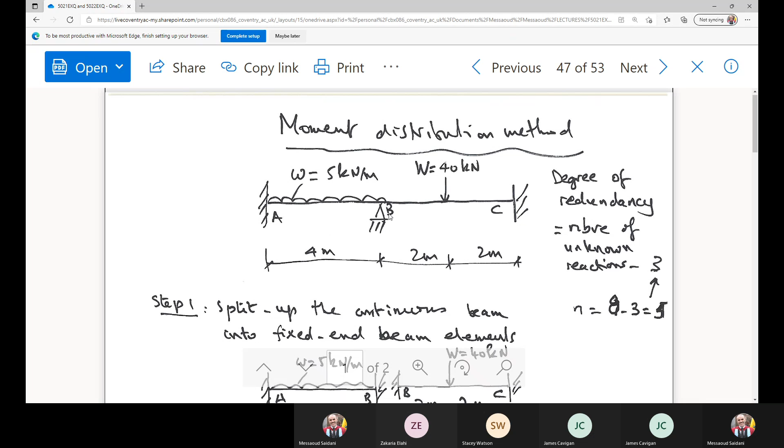The first step with this method is to split the beam up into fixed-ended beam elements. What do we mean here? We mean that you split the beam in the middle, at B, into 2 beam cases. So now we have AB, this one here. When you split up the beam, the intermediate joint becomes fixed. Can you see here? So intermediate joints become fixed, and now you have fixed-ended beam elements.

So we have AB with the 5 kilonewton per meter, and we have beam BC with the 40 kilonewtons in the middle. Okay, so that's the first thing.

Then we are going to use the fixed end moments, and this handout is already in Aula, so if you want to write extra notes, that's up to you. We use the table to obtain the fixed end moments, right? Let me see if I can share the table with you. Give me one minute, please.

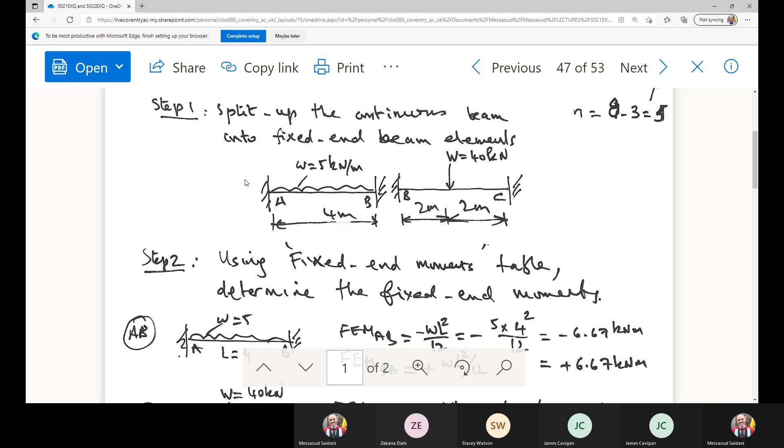Have you seen the table I've shared with you on Aula? The fixed end moment table. Anyway, there is a table that gives you the moments at the joints here. For example... Oh dear me. Okay sorry, it's taking me back. It's catching up.

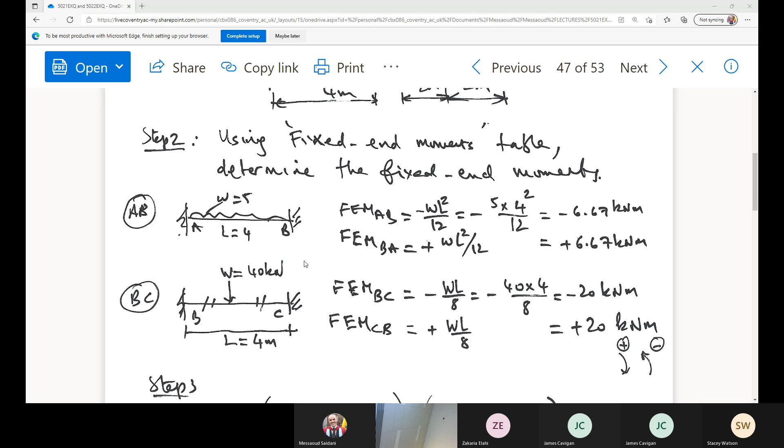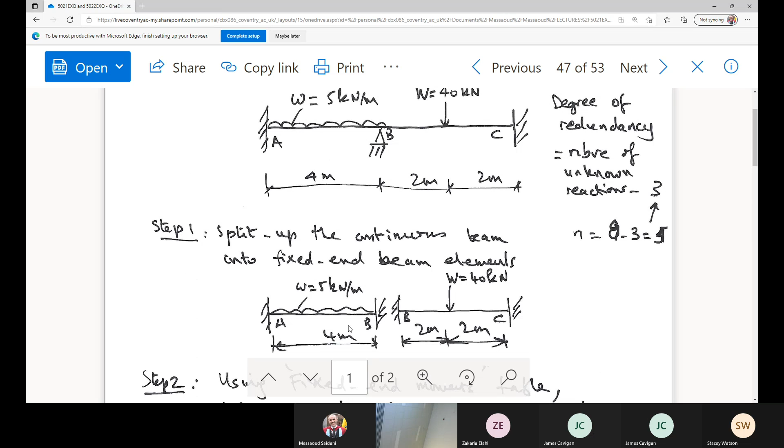The third step, okay, the third step. If we now try to reconnect, to reassemble the two elements here together to form the initial beam, what problem do we have? The problem we have is this now.

Okay look, so we have got this beam AB, we have an anti-clockwise moment of 6.67, and we have a clockwise moment of 6.67, and then we have a moment at B of minus 20, anti-clockwise. Yes.

Because it's fixed-ended, you have a beam here. It's not simply supported, it's fixed-ended. Can you see the difference?

Yeah, we are using a table here. There is a table that I have uploaded. Let me see if I can show you the table here. Let me see if I can share with you the table. Okay, just one moment. No, it's not sharing the visualizer. That's the problem, sorry about that.

Yeah, I mean this is the table on Aula. If you look at the table on Aula, that's a table, and it gives you the moments at the joints for each case, right? And all you have to do is basically use it. You don't have to memorize the moments by heart, okay? So use this, this is from the table straight away, okay?

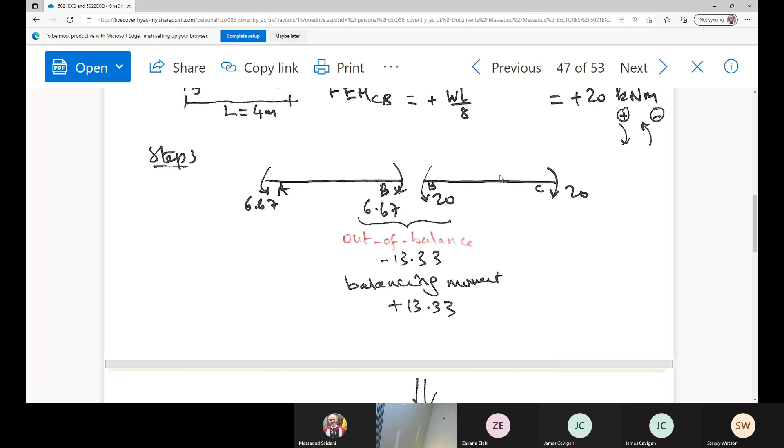That moment, this moment here, we are going to balance it and distribute it to the adjacent zone. How much you give to each beam depends on the rigidity or the flexibility of the beam. So that's what will decide how much we distribute to the other. That's the next step.

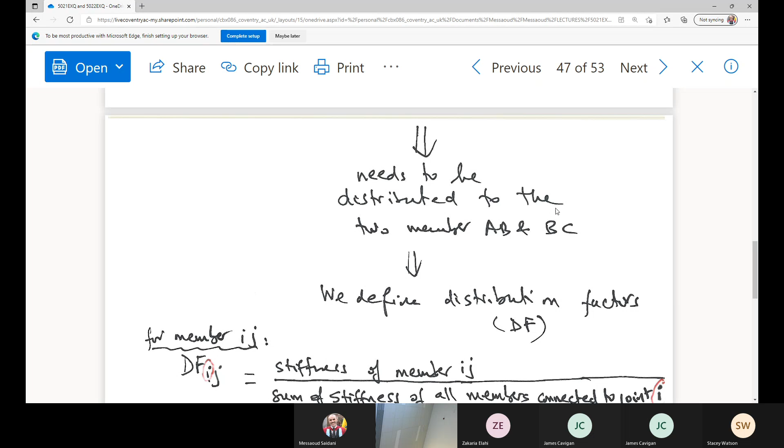So the next step is to distribute the out of balance moment to the adjacent joints, and we do this by defining what we call the distribution factors. The distribution factors tell you how much each beam will take, how much each adjacent joint will take from the beams.

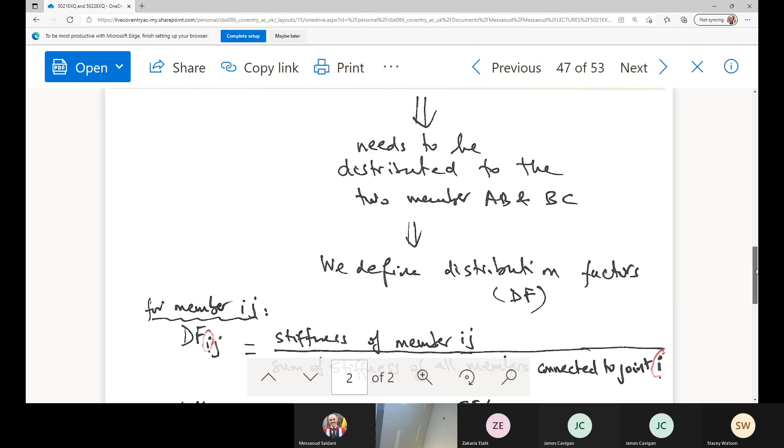By definition, the distribution factor for a member IJ, in general - I go back to AB and BC in a moment - the distribution factor is equal to the stiffness of the member IJ divided by the sum of all members connected to joint I. The first subscript always refers to the joint in question. So the distribution factor for member IJ will be the stiffness of IJ divided by the sum of the stiffness of all members connected to joint I.

For example, if I substitute I by A and J by B, that will be the stiffness of member AB divided by the sum of all members connected to joint A. If I substitute this by B, A, the distribution factor for BA will be stiffness of BA divided by stiffness of all members connected at B. How many members are connected to B?

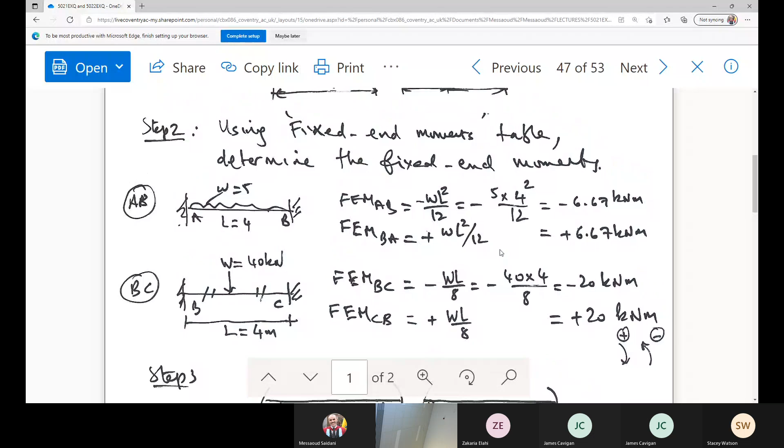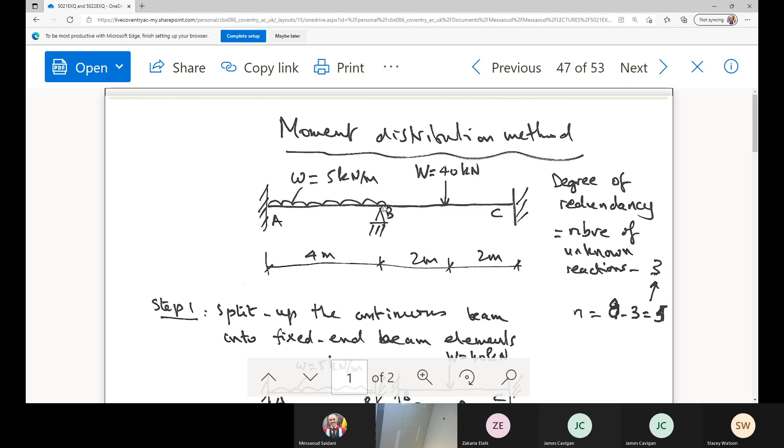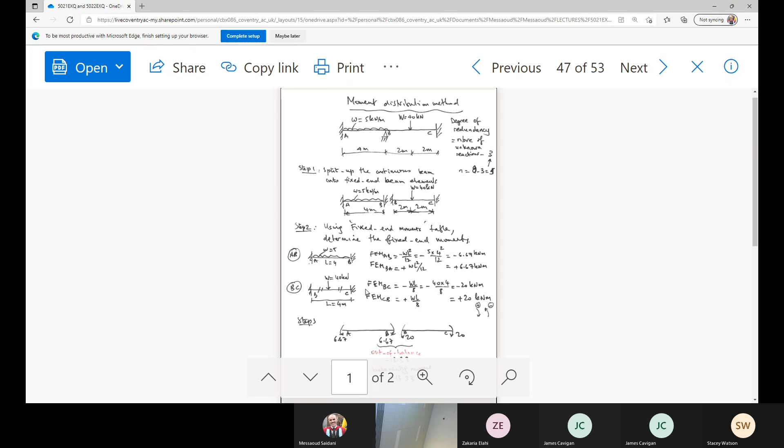Look here. There is only one member connected to A, and only one member connected to C, but at B we have two members connected, BA and BC. So when you use that definition, always remember that the first subscript in your definition is referring to the joint itself.

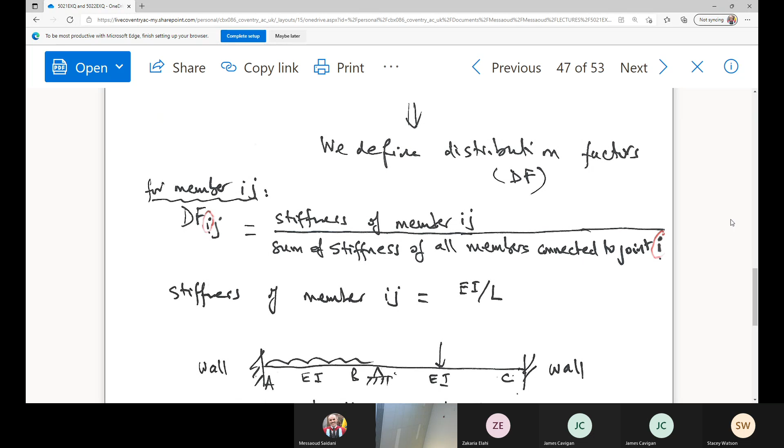So that's the definition. And what is the definition of stiffness? The stiffness of a member is equal to EI divided by L. What is E? Young's modulus. And I is the second moment of area about the neutral axis, or the moment of inertia, divided by L, the span of the beam. So if you have a beam AB, the stiffness will be Young's modulus for that member times the second moment of area about the neutral axis divided by L. This is usually given to you - I don't expect you to determine I at all, it's always given, and you divide it by L.

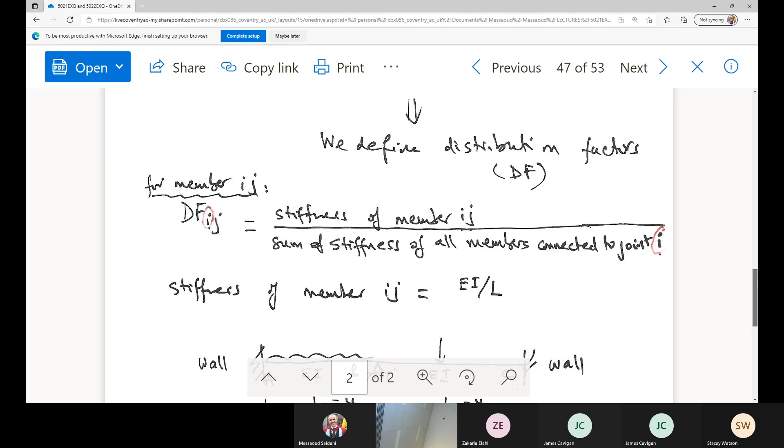Going back to our beam, this is our beam here, AB. Joint A is fixed. Imagine you've got a beam fixed to the wall - a wall on the left and a wall on the right. The beam is infinitely rigid, connected rigidly to the wall here and the wall there, and then it's supported in the middle. What could it be?

It could be a column. You could have a beam, isn't it? You can have a continuous beam, and you have columns in between. So the supports here could be, for example, a column.

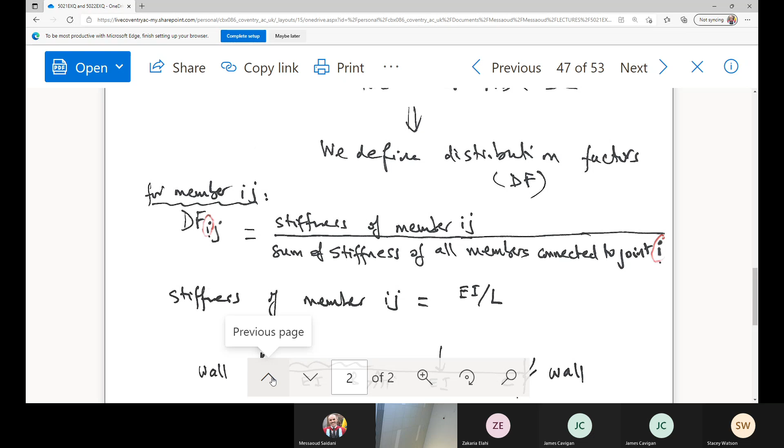Anyway, I'm going to use this definition for each of the joints: joint A, joint B, and joint C. We have three joints, so I'm going to use it for all three. Starting with joint A, look at the definition here.

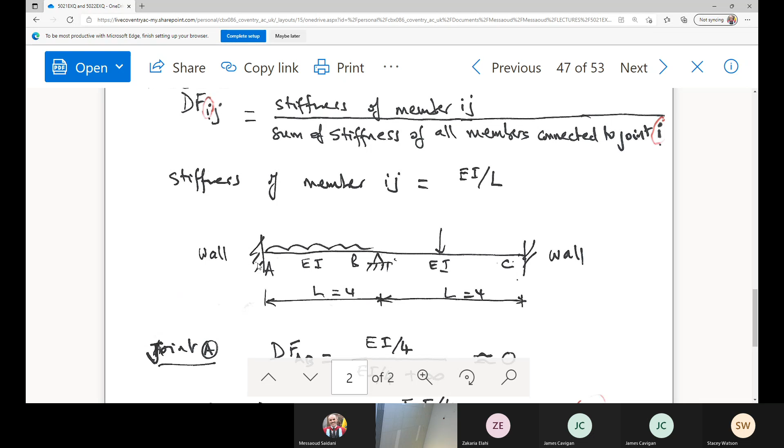Starting with joint A, the distribution factor for AB, because we have only one member connected to joint A, that's member AB, will be stiffness of AB divided by the stiffness of all members connected to A. Stiffness of AB is EI over L, which is 4, divided by stiffness of all members connected to A. We have one member connected to A, and on the left side we have the wall. So you have EI over 4 for this member, plus the wall.

We assume that the wall is infinitely rigid, so we give it a rigidity of infinity - very, very large. So when you divide something by a very large number, what do you get? Do you agree you get 0? Yeah, if you divide something by infinity, you get 0, if it's very large.

Similarly, for joint B, we have two members: member BA and member BC, so we need to consider both. For member BA, we have stiffness of BA, which is EI over L, which is 4, divided by the stiffness of all members connected to B. Members connected to B: we have EI over L over 4 for AB, plus EI over L, which is again 4 here for BC. It just happened that in this case AB and BC have the same span, but they could have different spans.

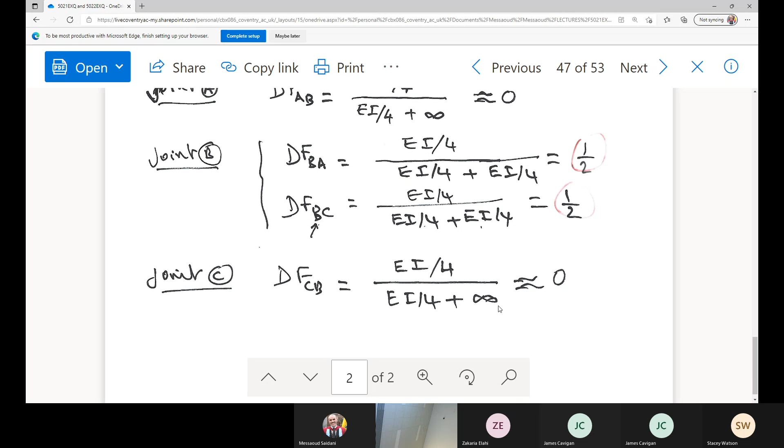Anything at all? Okay, so finally for joint C, we have only one member connected to joint C, and that's member CB, so it's very similar to joint A. We have EI over 4, that's the stiffness of CB, divided by the stiffness of CB plus the stiffness of the wall, which is infinity, and that gives 0. So now we have the distribution factors for each joint: for joint A we have 0, for joint B we have two members, so it's half and half, and joint C is 0.

I don't want to give you more - how do you say it - I don't want to give you more to chew today. I want to leave something for next week.

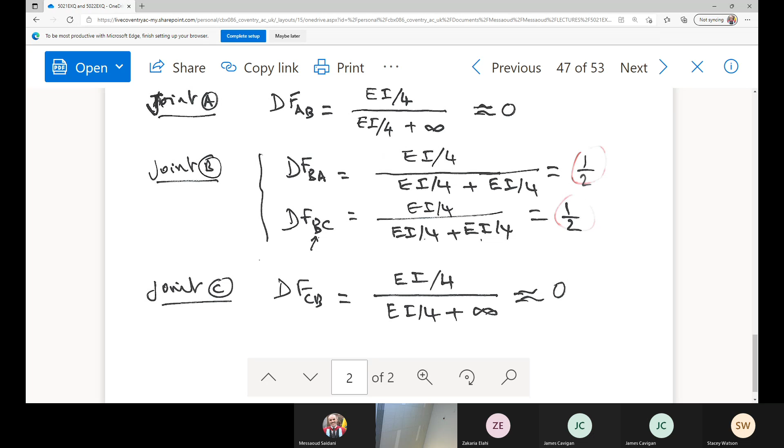No questions on this? Okay, thank you. Where can I find the... No, not this one.

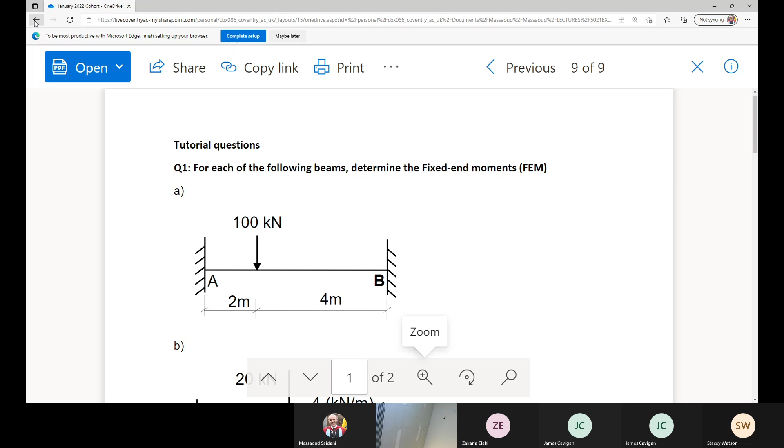What answers do you get? 58 something, isn't it? Is that what you all get, or is it 88? I don't know, I can check the answers. Okay, I can check it quickly. So you should get, for the first one, the answers are minus 88.89 and 44.4. Is that what you get, everyone? Always put the units, kilonewton meters.

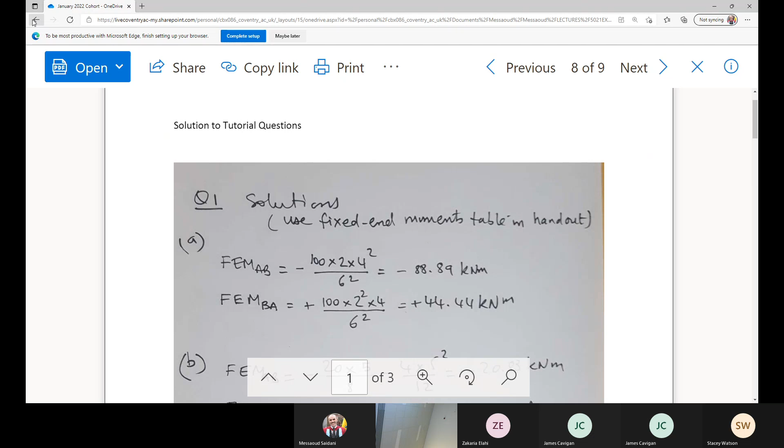Okay, let's look at number 2 now. Happy with that? So let's look at number 2. So the second one is this one here. And what we have again is a fixed-ended beam. This time we have a uniformly distributed load of 4 kilonewtons per meter, and we also have, on top of that, a concentrated load of 20 kilonewtons in the middle. The total span is 5 meters.

Which one are you using? We are using here from the table. Do you agree we are combining 1 and 3? So you're combining: you calculate the moments at A and B with the 20 kilonewton only, then you calculate the moments at A and B with the UDL only, and then you add them up together. Is that clear? You use what we call the principle of superposition, so you'll be superimposing the two together. You do it for 20, then you do it for the 4, and then you combine them together.

Okay, so basically at A it will be minus WL over 8, and then for the UDL you have minus WL squared over 12, and then you add them up together, plus. Is that clear? And you do the same at B. In this particular case, because the 20 load is in the middle, we know that the moments at A and B will be equal and opposite. We have symmetry, isn't it? So you only need to do it for A, and then for B it will be with a plus. So you have minus at A and plus at B, equal and opposite.

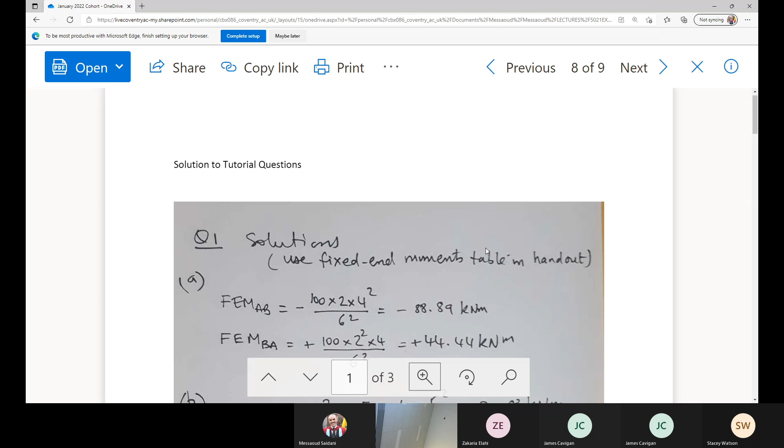Yeah, so this is the second one. We use the principle of superposition. So you have minus WL over 8, minus WL squared over 12, which gives minus 20.83. And then you do the same at joint B: you have WL over 8, 20 times 5 over 8, and then you have W, 4 times the span, 5 squared over 12, which gives 20.83. You can see that the two are actually equal and opposite, which is what we said, because we have symmetry.

Okay, so when you have a combination of loading, you may need to use more than one of the equations from the table. So if I give you two UDLs and two point loads, you have to use the equations from the table for each individual case and then add them up together. It's not difficult. Whatever the complexity of the loading, it doesn't matter, because you can always use the principle of superposition for any complex combination of loading. Is that clear? Okay, so let's go back and see if we can do the third one in the remaining time.

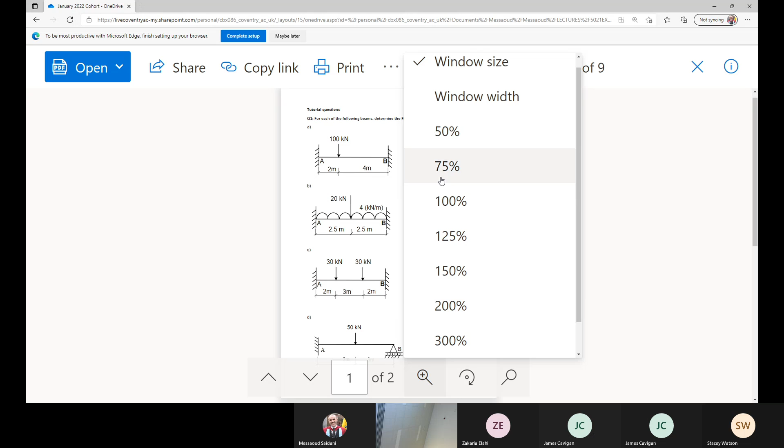So number 3 now. For number 3, we have got 2-point loads, 2 concentrated loads. We have 30 kilonewtons at 2 meters from A, and also 30 kilonewtons at 2 meters from B, and the total span is 7 meters. So 3 meters between the two loads and 2 meters from either end, which gives a span of 7. Again here, which one are we using?

Number 2, how many times? Twice. So using number 2 twice. That was the exam question last semester, and a lot of people were thrown by this. Although it's quite simple actually, a lot of people struggled to figure out that you need to use number 2 here twice.

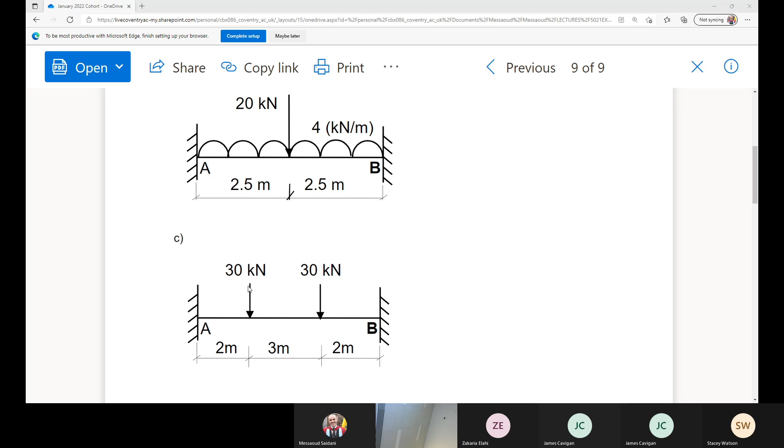For the first case, for this 30 kilonewtons, A is 2 and B is 5, and then for this 30 kilonewton, A is 5 and B is 2. That's all, and then add them up together. The reason I'm giving you all these examples is just to show you that it doesn't matter what combination of loading you have, it's the same table. You can use it over and over again, whatever loading you have. That covers every possible combination you can think of. So when you have a loading like this, don't think, oh my God, it's not in the table. It is there. You just have to use the principle of superposition for your particular load combination.

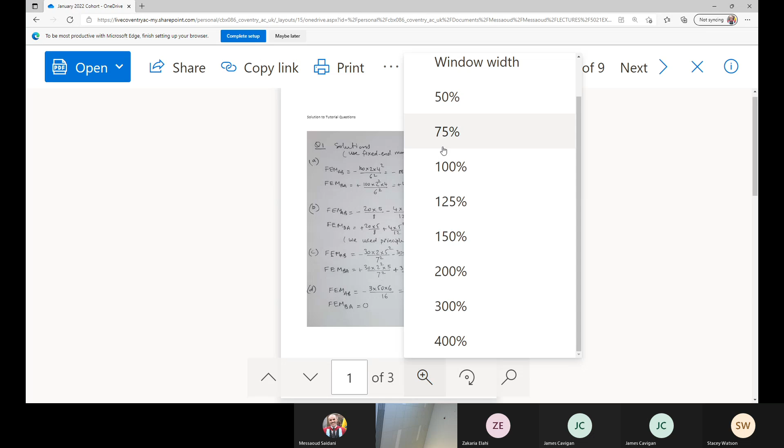So again, let me reveal the answer, the solution. This is number 3. Can you see here, we've used it twice, so you have got A and B interchanged. Which gives, not surprising at all, minus 42.86 and plus 42.86, because the beam is symmetrical. Because we have a symmetrical arrangement, the moments at A and B will be equal and opposite sign, clockwise and anti-clockwise.

So again, watch out for this. I had students who used the equation correctly, they spotted that we have to combine, but they got the wrong answers, because they didn't realize that they have to be equal because of symmetry. Any questions? Okay, let's carry on.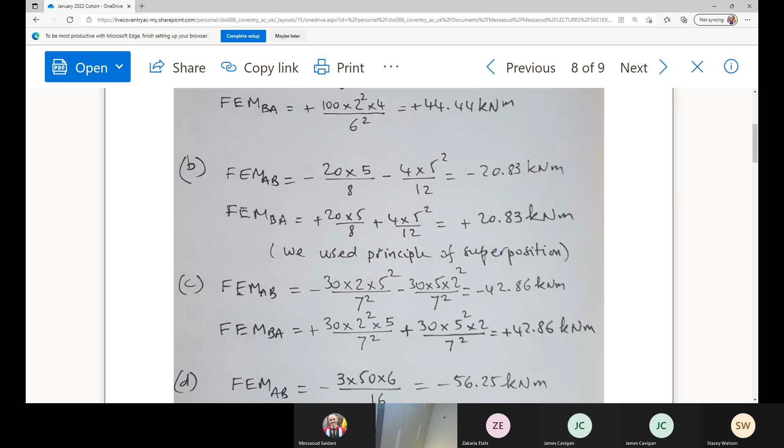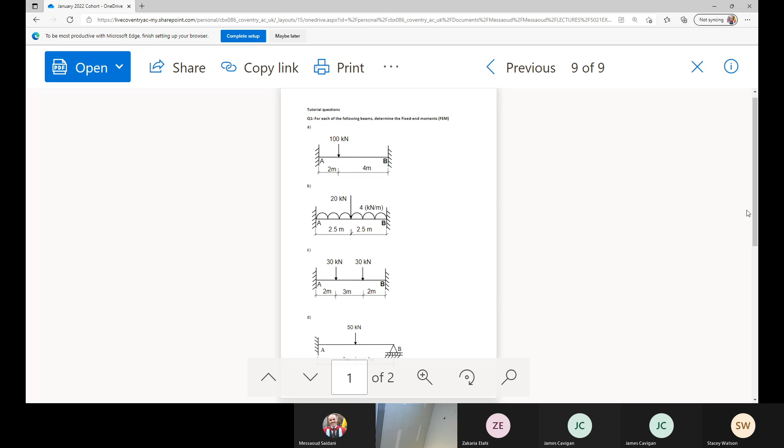I think we can do one more maybe. Please do stop me if there is anything not clear. Now I think that's the last one, isn't it, for today? Yeah, okay.

Now we have got this arrangement. This time, the beam is fixed at A, and we have a roller or a simple support at B, and we have a point load in the middle, at 3 meters from A and B. And we're using which one? 1, 2, 3, number 4. You agree? Yeah. Number 4.

Is that clear? Okay, number 4. So in this case, we know that the moment at B is 0 because it's a simple support, so we have a roller here. And the moment at A, again, if you look at the table, we know it's going to be negative because it's anti-clockwise.

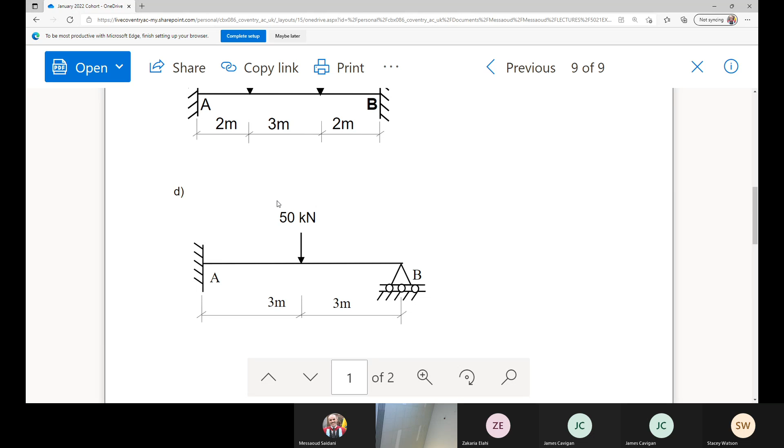And the moment is minus, at A is minus WL squared over 8. W is, sorry, I do apologize, I was looking at the wrong one. So it's minus 3WL over 16. Minus, so the moment at A here is minus 3WL over 16. W is 50, and L is 6. So when you substitute, you should get the answer minus 56.25.